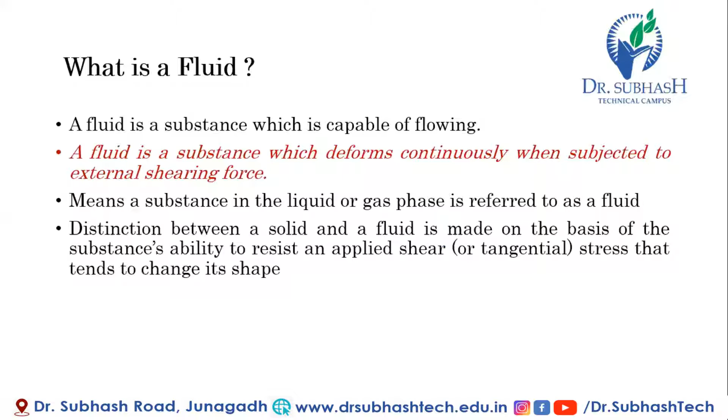So what is fluid? In layman terms, a substance which can flow is called a fluid, or we can say one which is capable of flowing. But in technical terms, a fluid is a substance which deforms continuously when subjected to an external shearing force. Means a substance in a liquid or gaseous phase is referred to as a fluid.

Distinction between the solid and the fluid is made on the basis of the substance's ability to resist an applied shear stress in the tangential direction that tends to change its shape. That is the basic difference between fluid and solid. So we can say a fluid is capable of moving itself, or it does not have any definite shape; it has a volume but does not have a shape.

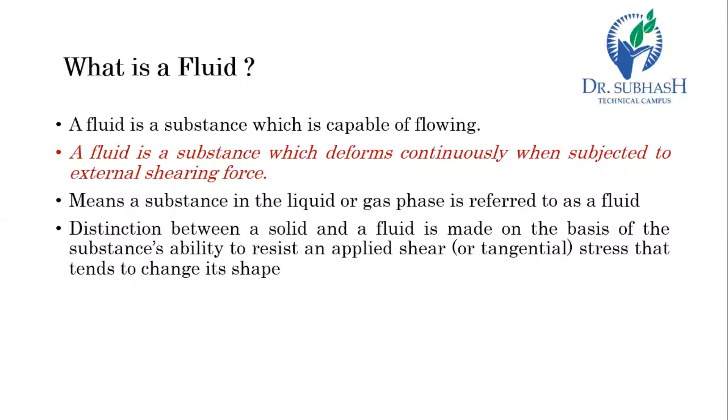Now, what is fluid mechanics? Obviously, it is the study related to the fluid. Fluid mechanics is defined as the science that deals with the behavior of the fluid at rest as well as in motion, and the interaction of the fluid with the solid or other fluid at the boundaries. So, fluid mechanics is a wide branch, and it contains fluid statics, fluid kinematics, as well as fluid dynamics.

Now, what is the difference between all these three? Fluid statics is the study of the fluid at rest. The fluid does not have any velocity, it is in rest condition, so it has only gravitational force. In fluid statics, we consider only the gravitational force, the weight of the fluid.

Fluid kinematics includes fluid in motion where the pressure forces are not considered. And in fluid dynamics, pressure force is considered when the fluid is in motion. So these are the three subcategories of the very wide subject fluid mechanics.

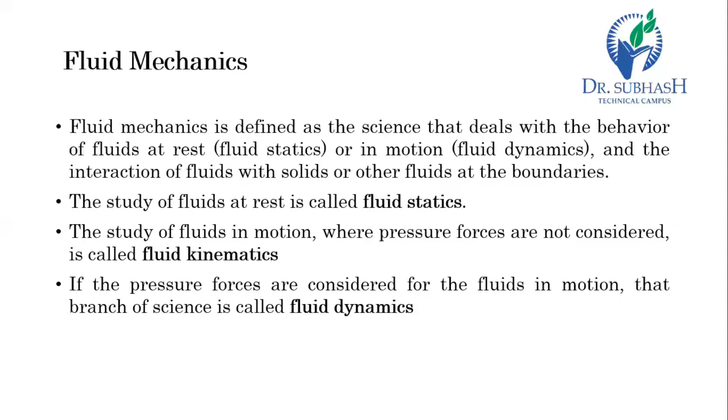Now let's start with the application areas of fluid mechanics, starting with our body. First, biomechanics. Blood is flowing through our veins and arteries, airflow in the lungs, flow of cerebral fluids. For the study or measurement of any fluid flowing inside our body, we require the knowledge of fluid mechanics.

After our body, let's see household applications: piping systems for cold water, natural gas, and sewage all require the knowledge of fluid mechanics. Piping and ducting networks of heating and air conditioning systems, refrigerator, vacuum cleaner, dishwasher, washing machine, water meter, natural gas meter, air conditioner, radiator, and many other equipment require the knowledge of fluid mechanics.

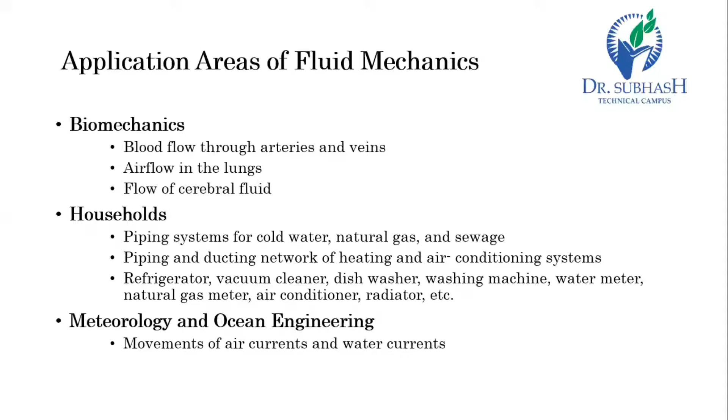In ocean engineering and meteorology, the movement of air currents and water currents also requires knowledge of fluid mechanics. In our branch, mechanical engineering: design of hydraulic machines like pumps, turbines, air conditioning equipment, pollution control equipment, design analysis of aircraft, boats, submarines, rockets, jet engines, wind turbines, biomedical devices, the cooling of electronic components, and the transportation of water, crude oil, and natural gas. These are the areas of mechanical engineering where fluid mechanics is used.

So after listing all the areas, no area of this branch is untouched by fluid mechanics. As well as mechanical engineering, civil engineering also requires fluid mechanics in the transport of river sediments, pollution of air and water, design of piping systems, and flood control systems. These areas of civil engineering as well as canal engineering require knowledge of fluid mechanics.

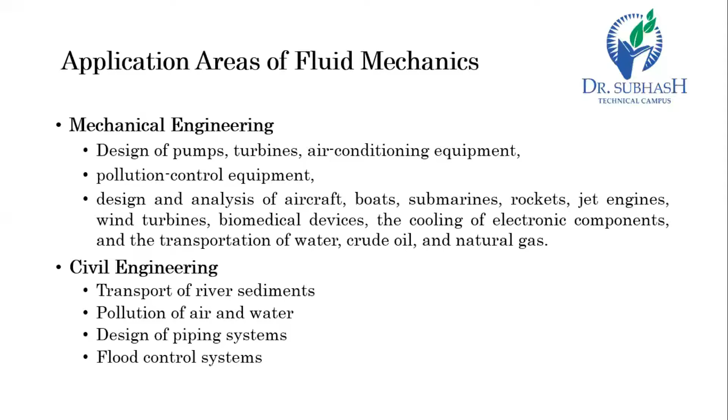In chemical engineering, design of chemical processing equipment and turbo machines like pumps, turbines, fans, blowers, propellers, etc. require the study of fluid mechanics. In the military: missiles, aircraft, ships, underwater vehicles, dispersion of chemical agents. In automobile engineering: IC engines, air conditioning, fuel flow, external aerodynamics, etc. require the knowledge of this subject.

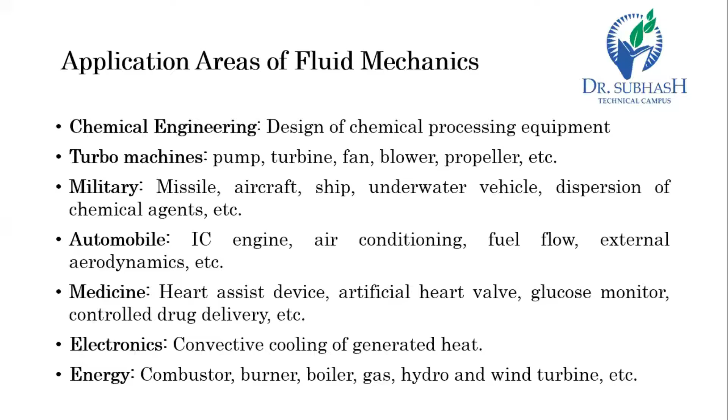In medical engineering, medicines, heart assist devices, artificial heart valves, glucose monitoring, controlled drug delivery, etc. use fluid mechanics. In electronics, convection cooling of the generated heat requires this knowledge. In the energy field, combustors, burners, boilers, gas, hydro, and wind turbines require the knowledge of fluid mechanics.

In the oil and gas industries: piping systems for the transportation of fluids from one place to another, gases in refineries, pumps for pressurizing, valves to regulate the flow, offshore rigs, oil spill cleanup, etc. Knowledge of fluid mechanics is applicable to all these areas.

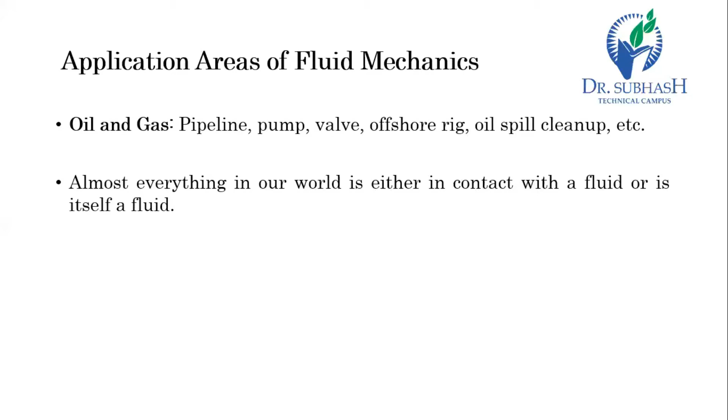So in layman terms, there is no area around us or around the globe where fluid mechanics is not used. Almost everything in our world is either in contact with a fluid or is itself a fluid. So fluid mechanics is a very wide branch, and the most important subject for the mechanical engineer. Now let's talk about the characteristics of the fluid. Now what we have seen previously, that all the areas of this